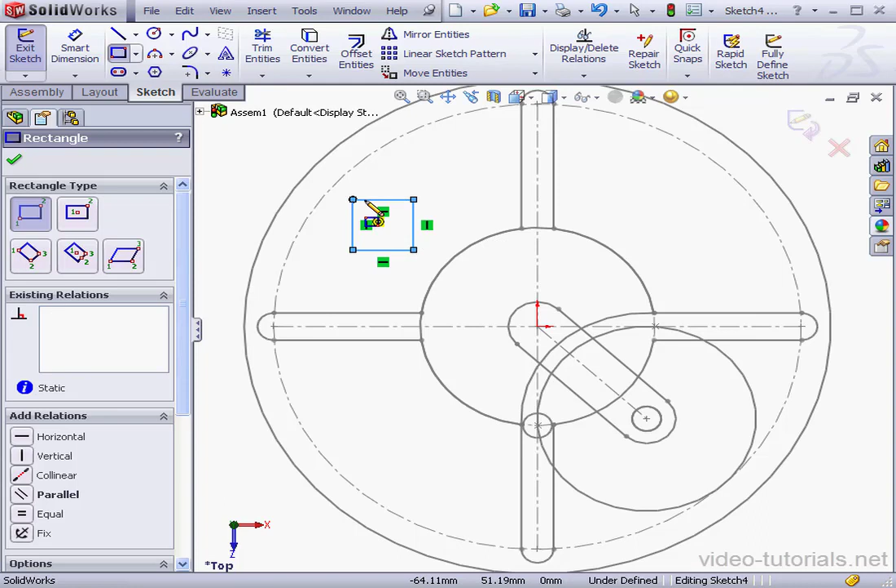Let's insert a sketch on the top plane. Activate the rectangle tool and drop it about here. Now with the square selected, let's go to the Tools menu, Blocks, and select Make. Accept, and exit the sketch.

Now if I try to convert this block to a part with a right-click, we don't have that option available in the contextual menu. Let's right-click and delete Sketch 4. Let's use a different method instead.

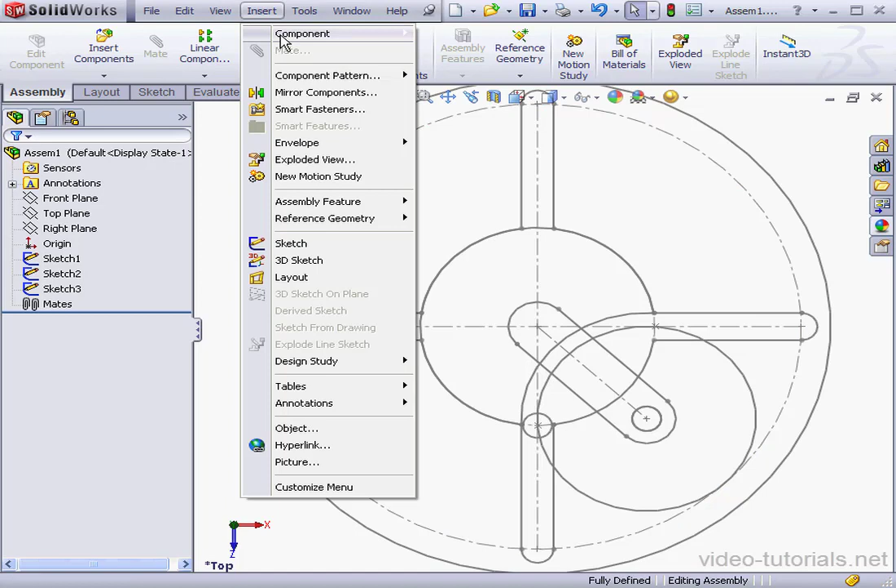We're going to insert a new part, Component, New Part. To align the part and the assembly orientation, I'm going to select the front plane. And let's cancel out—do we want to discard everything? Okay. Since we selected the front plane first, our part is oriented the same way as the assembly.

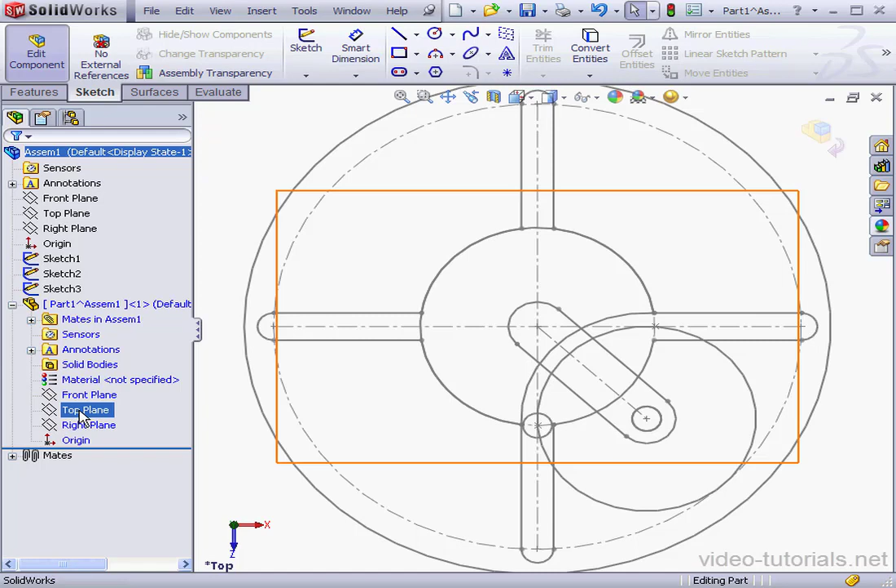Let's insert a sketch on the top plane. Now I'm going to select Sketch 1 and click Convert Entities. Cancel out of the tool. The sketch is fully defined. Let's exit—we're ready to create a solid.

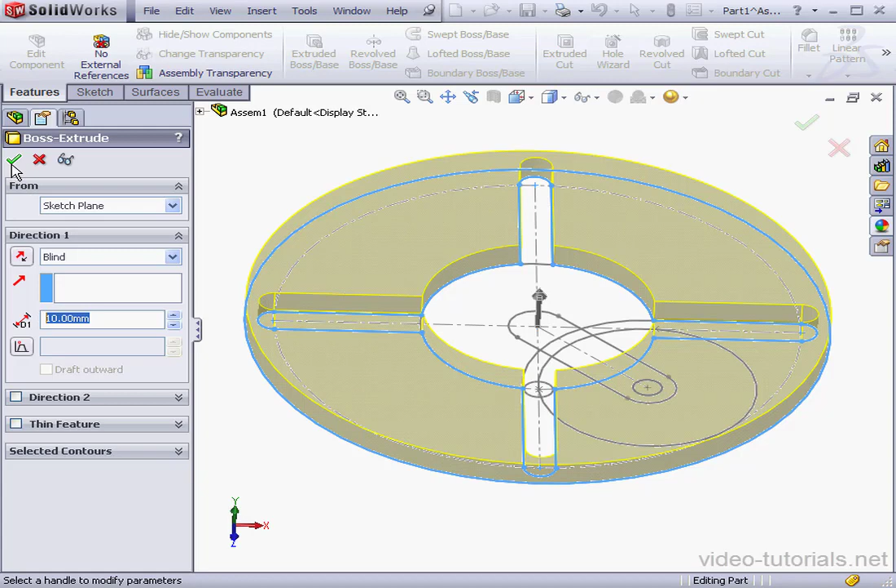Go to the Features tab, Extruded Boss Base. Since our sketch was on the top plane, I'm going to extrude my solid so that it's located above the top plane. A 10mm extrusion should do it. Let's click OK.

Now let's change the color. Right-click, Appearances—we'll change it at the part level. Let's choose, let's say, red. Exit and update.

Now let's hide Sketch 1. Right-click, Hide Sketch. Next, we need to create the crank.

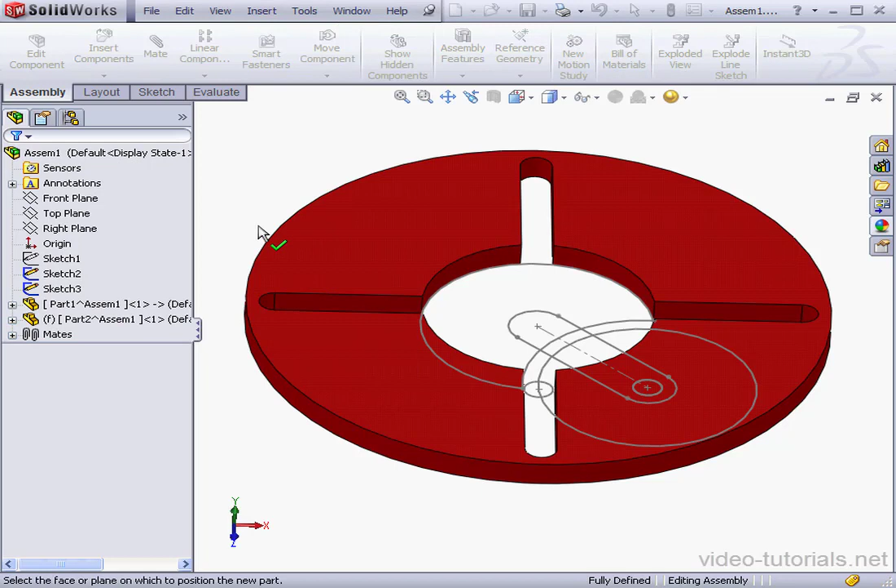Again, Insert, Component, New Part. Select the front plane to align the part with the assembly. Cancel out of the sketch—do we want to discard? Yes. And let's insert a sketch on the top plane.

Right-click, Insert Sketch. Select Sketch 2, and click Convert Entities. Sketch is fully defined. Let's cancel out of the tool, and let's exit the sketch.

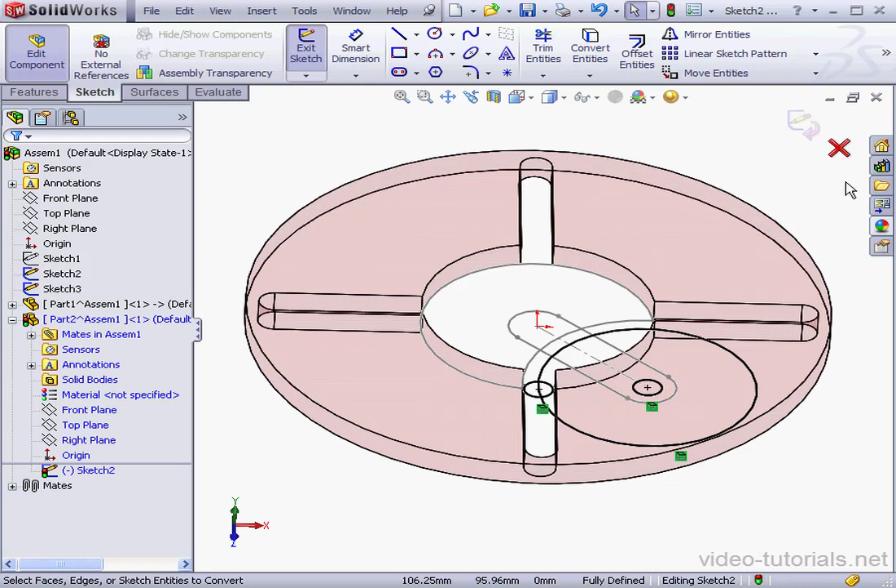Now to the Features tab, Extruded Boss Base. I'm going to use the Selected Contours method. Let's activate the window and make our selections. Change the extrusion direction—let's leave the depth at 10mm as well. Click Accept. Now let's hide Sketch 2 as well. Right-click and hide.

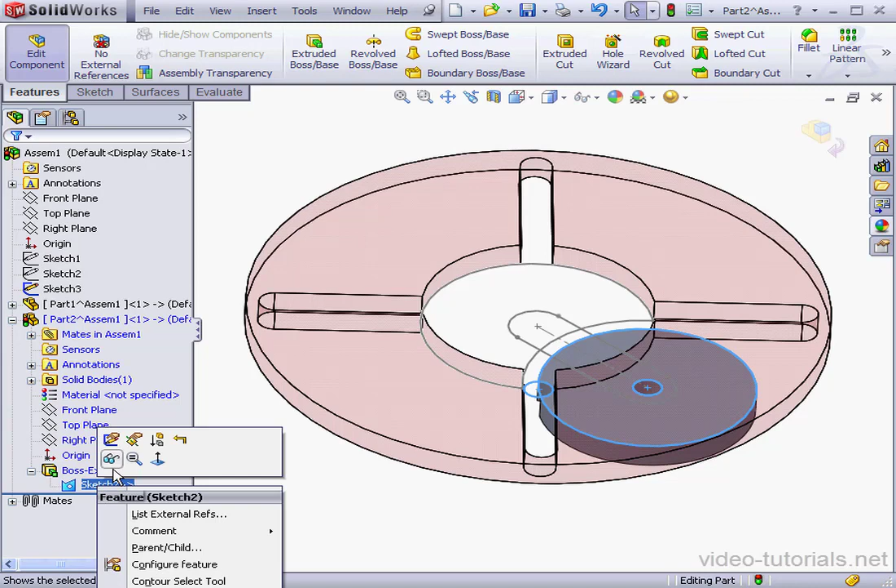Let's make Sketch 2 visible again. Select the sketch, activate the Extruded Boss tool. We'll specify the contour again, and this one here.

The pin needs to go in both directions, so for this reason I'm going to use a mid-plane extrusion. Change the depth to 20mm. Merge Result is checked, and let's accept.

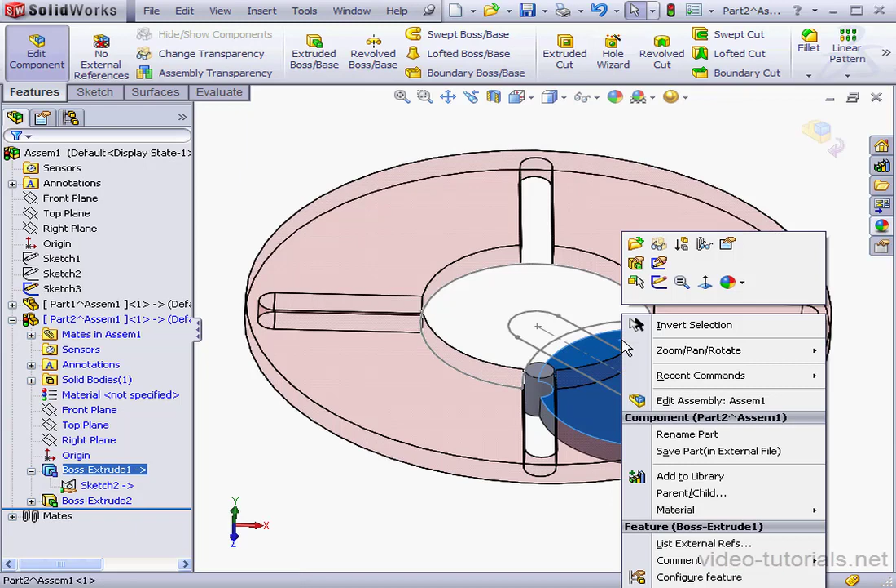Now let's right-click and hide Sketch 2. We'll change the color as well, I'll do it at the part level. Let's use a light blue. And accept, exit the sketch.

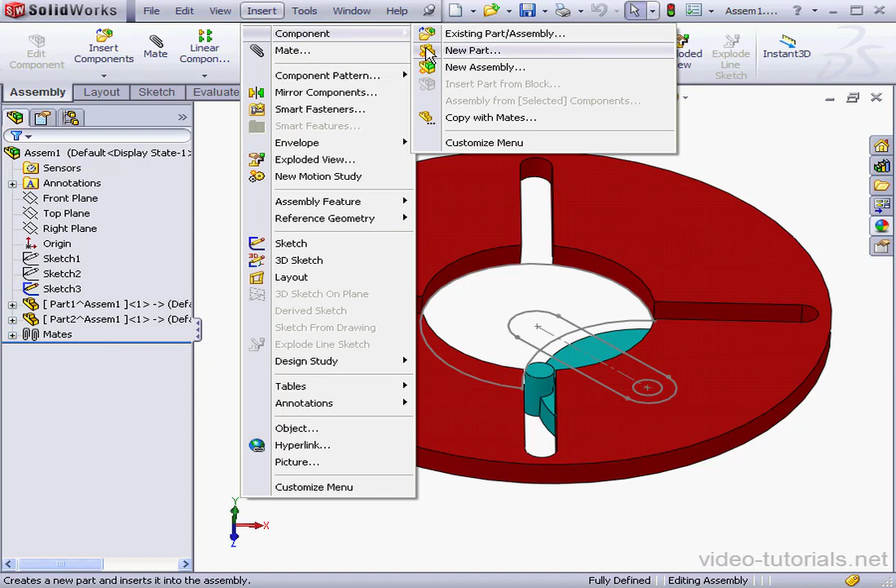Lastly here, we need to create the base. So let's do that again—we'll go to Insert, Component, New Part. Once again, I'm going to select the front plane, cancel out of the sketch. OK. Let's insert a sketch on the top plane.

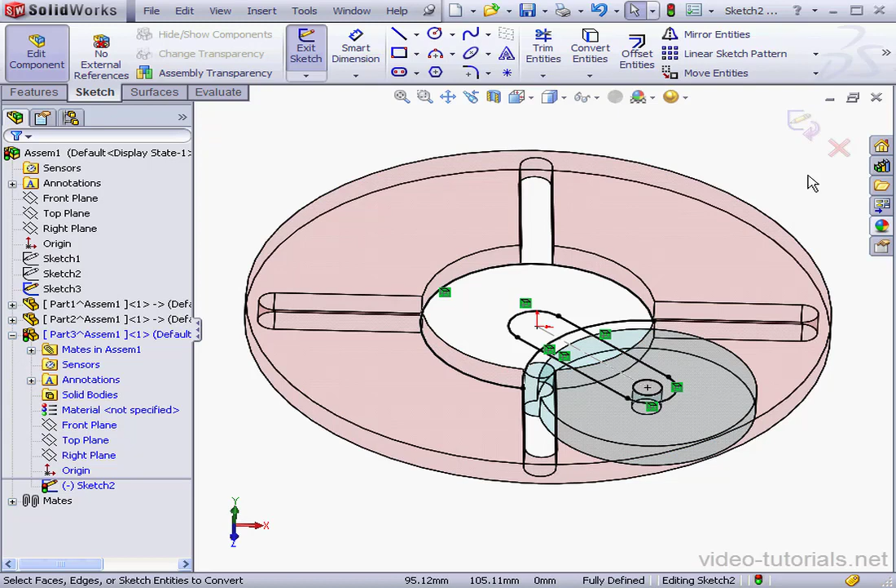Select Sketch 3, Convert Entities. Cancel out of the tool. Sketch is fully defined, so let's exit the sketch, and let's right-click on Sketch 3 and hide it.

I've just moved to the Features tab. Let's activate the Extruded Boss Base command, and with Selected Contours, let's activate the selection window and take our contours.

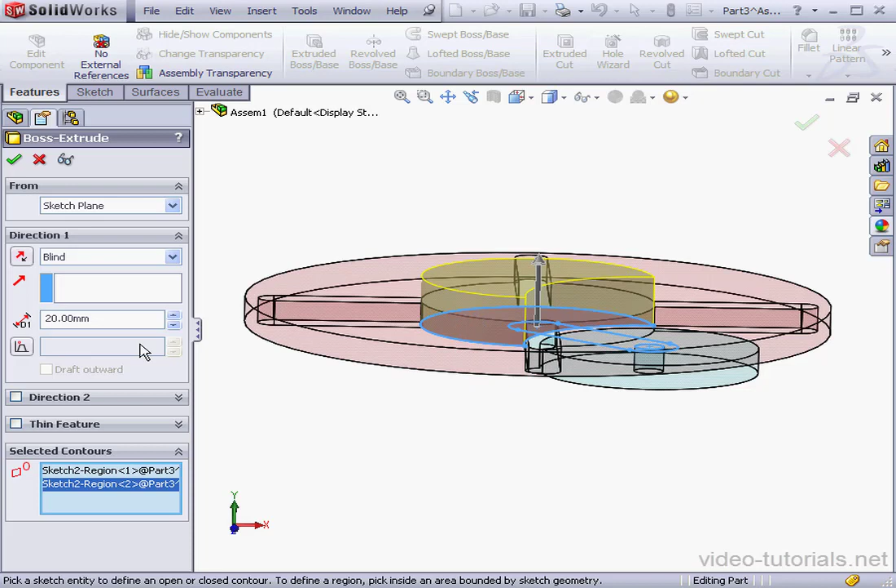For this extrusion, I need to go 10mm above the sketch plane and 10mm below, so let's use a mid-plane extrusion. 20mm for the depth. Accept.

Let's create a second extrusion now. Right-click, make sketch visible. Once again, let's pre-select the sketch. Extruded boss—let's select our regions now.

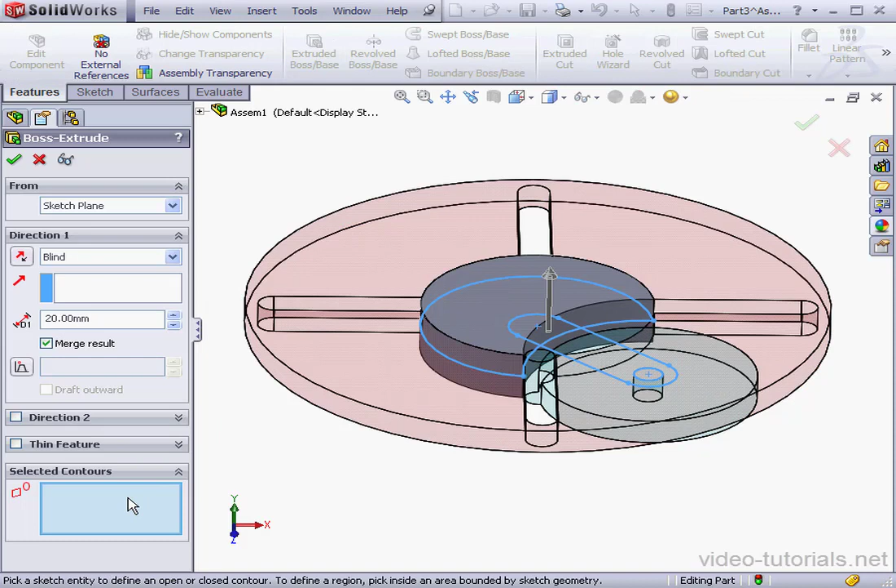This extrusion needs to go below the crank. To achieve this, I'm going to use the offset option. Let's enter an offset distance of 10 millimeters. Click here to reverse the direction.

Here the offset will also be 10 millimeters, reverse the direction. Merge result is checked, let's accept.

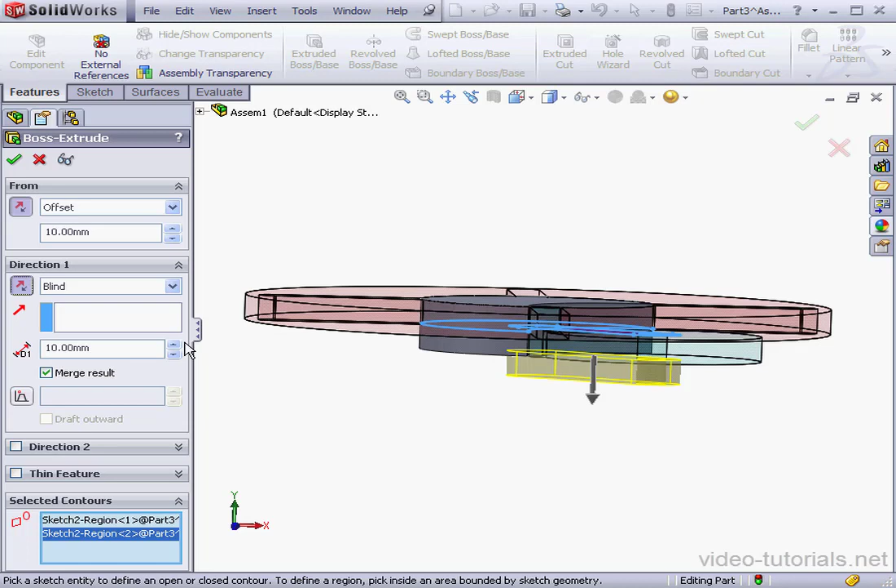Lastly here, we need to extrude the pin where the crank will rest. Let's select Sketch 2, Extrude. Select this region. Let's reverse the extrusion direction. 20 millimeters is fine, accept.

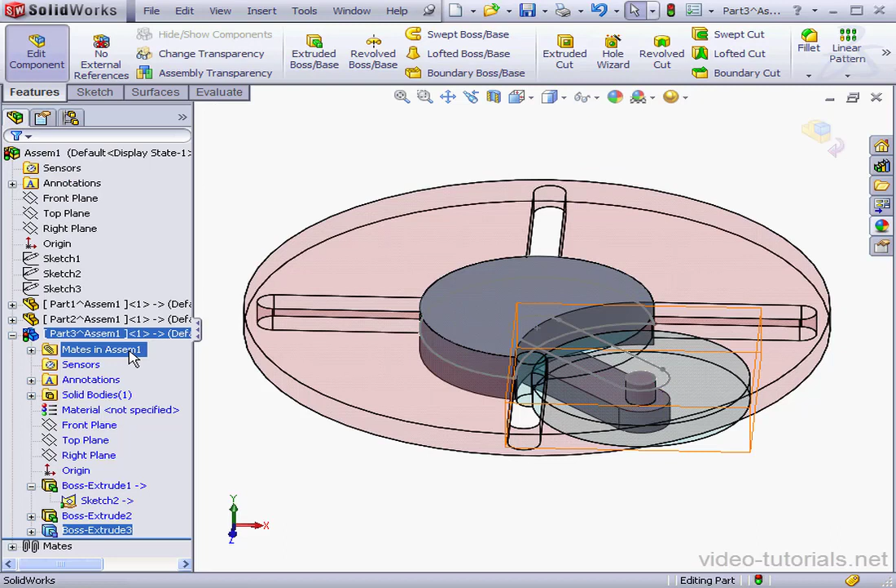Now let's hide Sketch 2. Right-click and change the color, we'll do it at the part level again. Let's use dark yellow, for example. Click Accept.

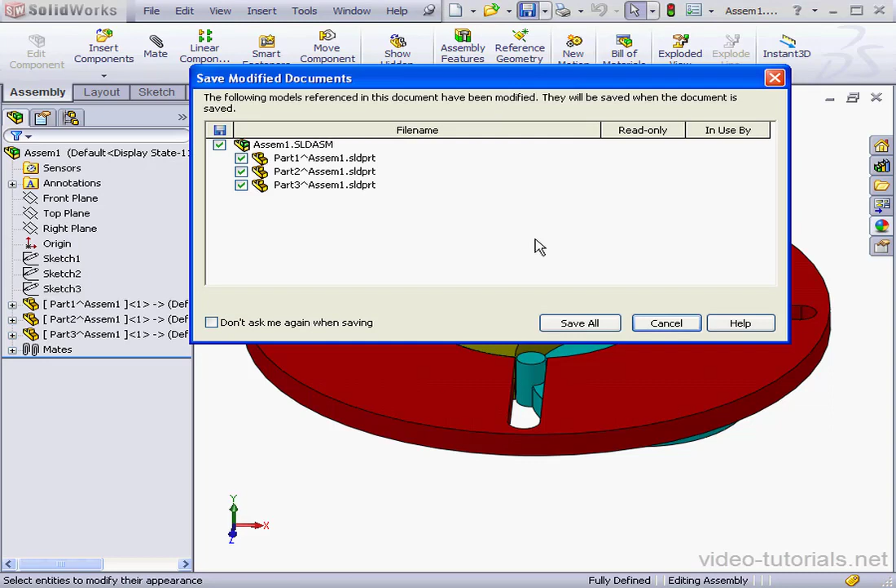Okay, let's exit and rebuild, and let's save our assembly as well. Parts 1, 2, and 3 are internal to the assembly. Let's save all. Save internally, OK.

Now if I try to move my components, it won't happen because we've got 3 in-place mates in the Mates folder. In order to test our mechanism, we're going to need to apply different mates. The first thing to do is add a fixed relation. Let's go to the Assembly tab. The most logical part for a fixed relation is the base, of course.

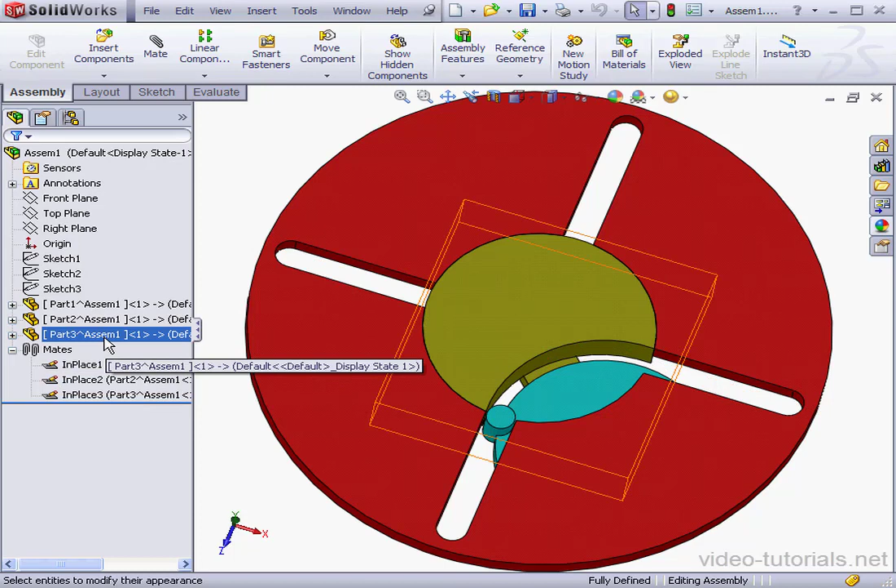However, watch what happens when I add the fixed relation to in-place mate 3. Let's right-click on it and select Fix. Notice that in-place mate 3 becomes suppressed. Let's select mates 1 and 2.

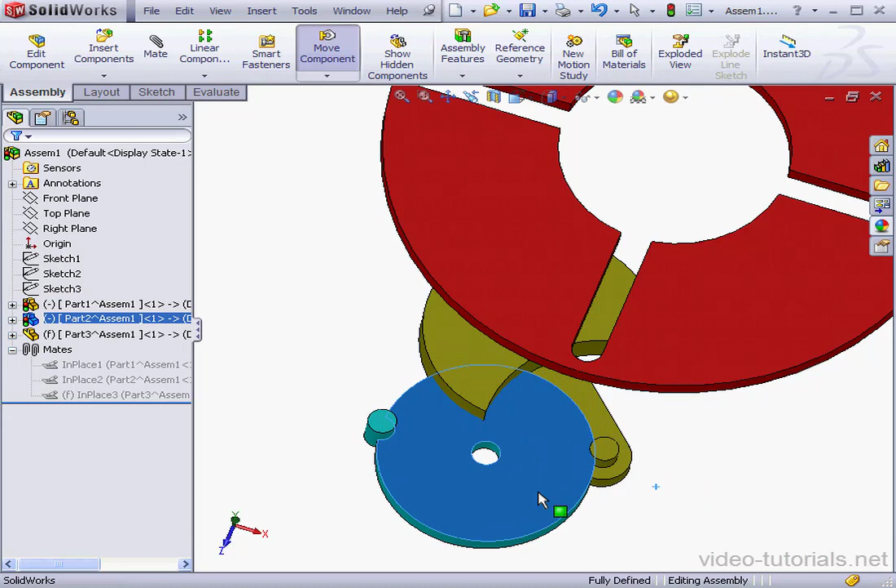Now we're ready to apply mates. Let's deselect everything and select the Mate tool. This edge and this edge, coincident. One more coincident mate—this edge and this edge, OK. And cancel out of the tool.

Now if I try to move my components, it still doesn't work, so let's figure out how we can make them work. The first thing we're going to do is align the components in the approximate correct position. In my case, the slot needs to be located in a way such that the pin can enter it.

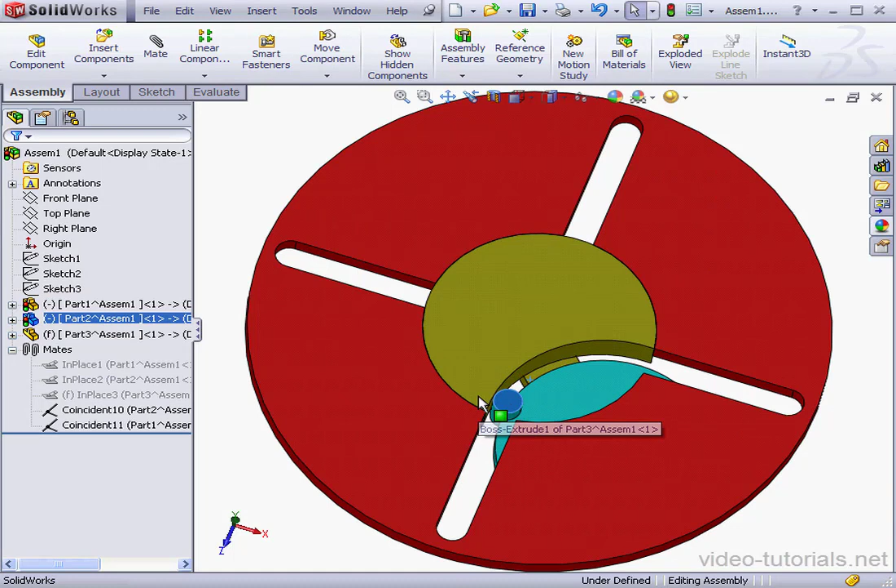Let's activate the Move Component tool. Options, Physical Dynamics. Now let's test our mechanism. Looks like it works just fine. If I didn't have the components in the correct starting position, watch what would have happened.

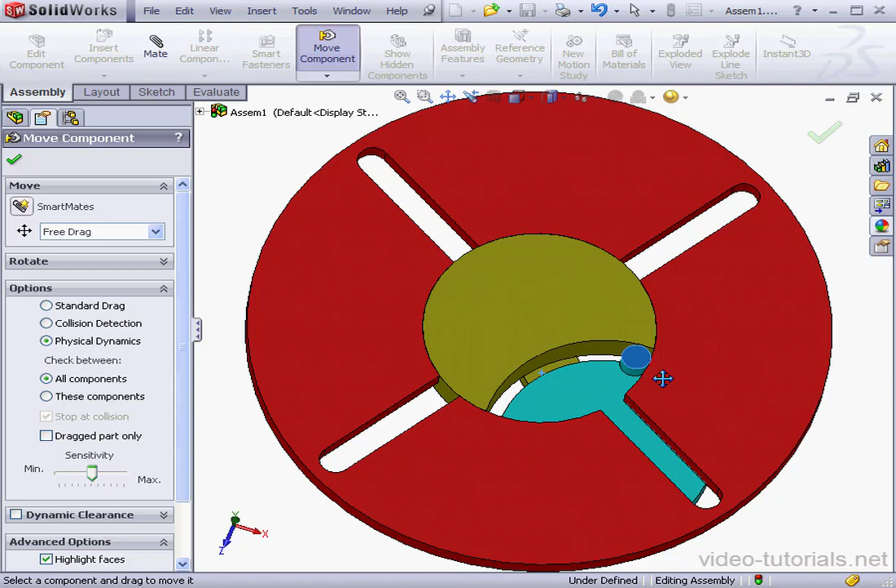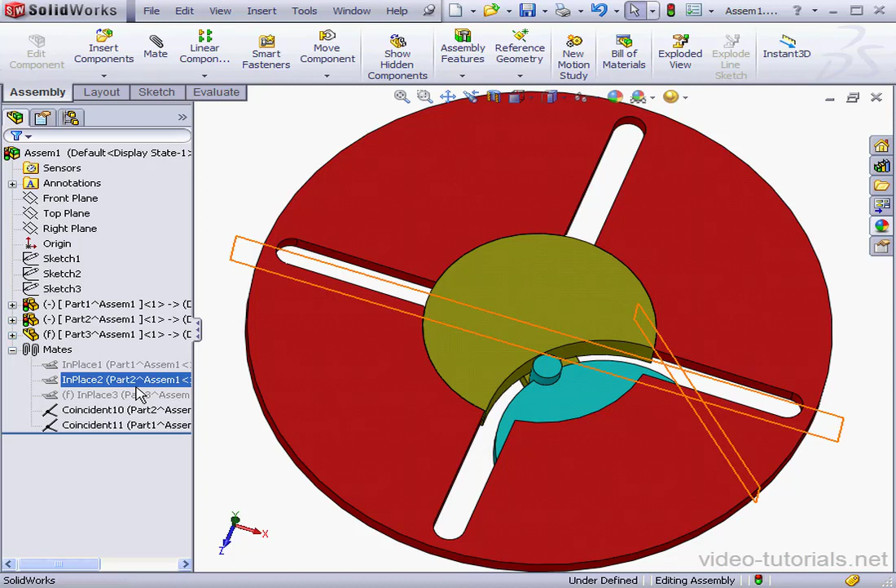Now you may be wondering why I simply didn't delete the in-place mates, but suppressed them instead. We're going to learn about this in our next lesson. And this concludes our project on the internal Geneva mechanism.